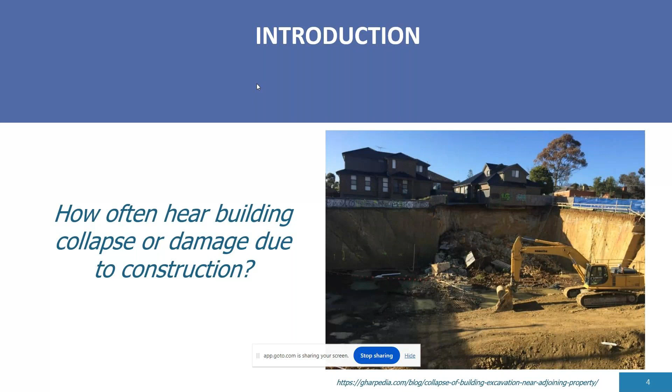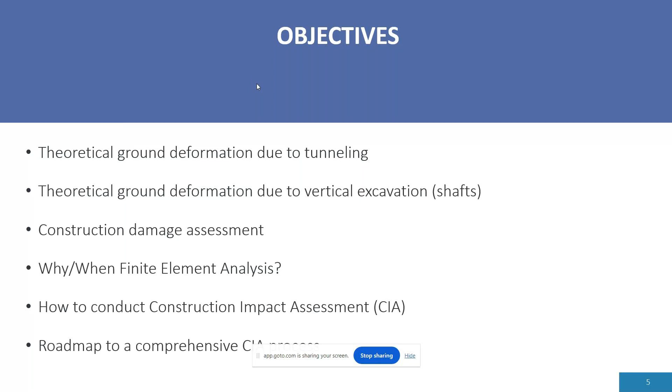So the objective of this session is to look into the theoretical ground deformation due to tunneling and excavation, which means vertical shafts, and also how we can conduct construction damage assessment, and why and when we can employ finite element analysis in this study, and how we can conduct a construction impact assessment and a roadmap for a comprehensive construction assessment.

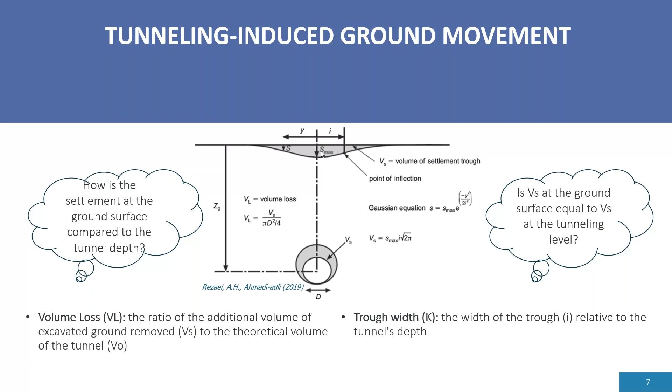So if we start to look into vertical excavation induced ground movement, there's a lot of theories that have been put forward to come up with the ground deformation curve, which depends on many factors.

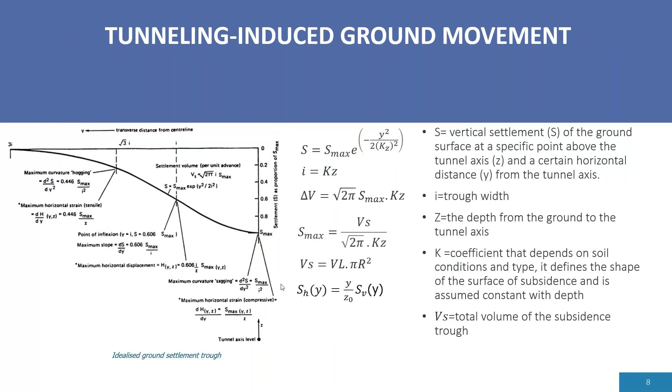For example, if our shaft was circular, some research has been done here. New 2017 conducted research based on circular shafts that happened at the London airport, and documented his observations, coming up with a routine or mathematical equation that fundamentally depends on the distance from the shaft, the excavation depth, and also the soil type.

It also depends on the width, the diameter of the excavation, and some empirical factors that depend on the construction method and the soil, to come up with the size of the ground and the depth of, or the value of the settlement relative to the width of this deformation curve.

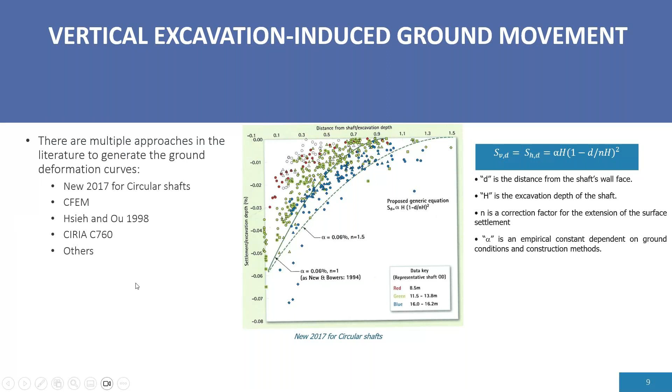For other shapes of shaft or vertical excavation, several methods have been adopted in the literature. For example, the Canadian Foundation Engineering Manual has employed a method, and CIRIA C760 and other methods have been explained thoroughly in the literature to come up with that.

If we look at the Canadian Foundation Engineering Manual, the ground deformation curve that happens due to excavation can depend on the type of excavation, or also our shoring or retaining structure. Based on the deformation of the lateral support system, we can have a different adjacent ground deformation curve.

The literature here, including the Canadian Foundation Engineering Manual, adopted this method to come up with the deformation curves. Based also on the type of soil, if the soil is sand, the manual has proposed curves that we can use to come up with the ground deformation curve based on the maximum lateral deformation that happens from the wall.

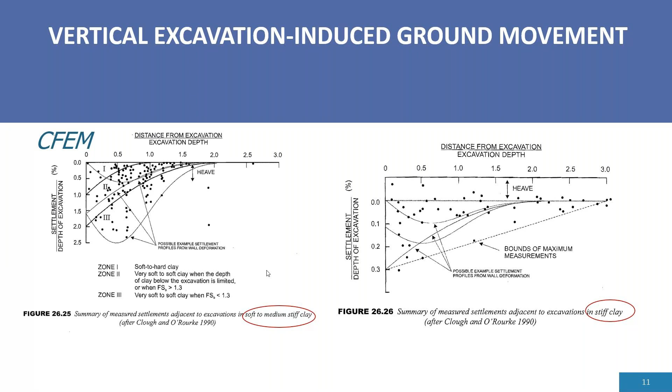If our soil adjacent to or in our excavation area is soft to medium or stiff clay, there are also curves that we can adopt in order to come up with the adjacent deformation curve, either vertical or horizontal.

Okay, this is very good so far. We already theoretically know how we can come up with vertical deformation that comes due to horizontal excavation from tunneling or cavern. And also we can now come up with a ground deformation curve that came from a vertical excavation also. But how can we integrate all of them together?

Now, in the world we live in right now, it's quite complex because there isn't only one shaft in the area, there isn't only one cavern or excavation in the area. You might find two shafts, one cavern in one area, and you need to start to integrate all of this deformation curve together in order to study the effect of this ground deformation on the adjacent structure. So we have excavation 1, excavation 2, excavation 4, and we have a building somewhere.

So you need to superimpose the effect of excavation that comes from one excavation onto the other, and then study this overall value of deformation into this building. Now it starts to be quite a complex process because with the number of complexity of different excavations and multiple buildings, this starts to be really hard and tedious to do.

So there are some commercial software that you can use in order to integrate the ground deformation curves that come from this theoretical values and create an overall map that you can adopt for your study. Yet it's still based on theoretical calculation.

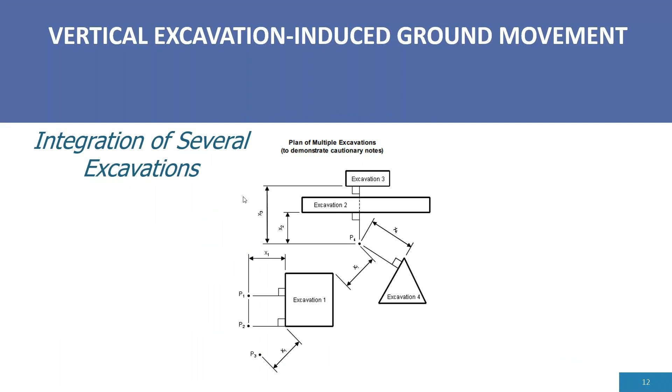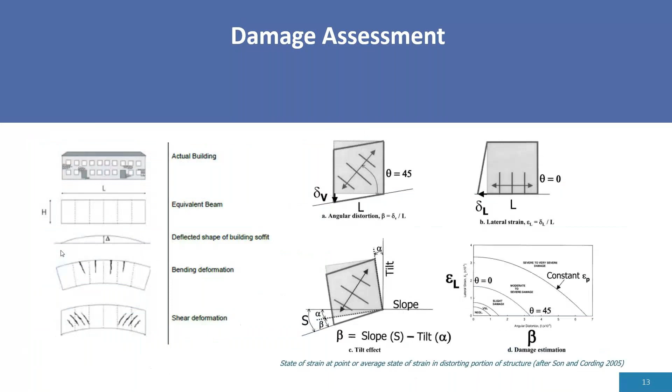Then this became outdated, and Son and Cording developed a critical tensile strain which corresponds to the level of damage. Based on the lateral strain and the angular distortion that we calculate, we can categorize this damage.

Whether we can say this damage is acceptable or not basically depends on the agreement in the project you're working on. In this project, they look at the damage and say the slight level is the threshold I can accept, or I will be accepting the damage until very slight, which doesn't require any mitigation measurement after the assessment.

But if this structure has encountered slight damage, I would say now I require more assessment, more investigation, or I will move to conduct mitigation measures to ensure that this building will be safe during and after the construction.

So fundamentally, this assessment we've seen is basically for a shallow foundation, or a building supported on isolated footing, which will fundamentally impact the brick system and the serviceability of the building.

But what if our building is bearing on a deep foundation? This is a different story, because now if we have excavation adjacent to a building supported on a deep foundation, it starts to be more complex, because this foundation will encounter different types of failures due to the extra load that comes from the excavation.

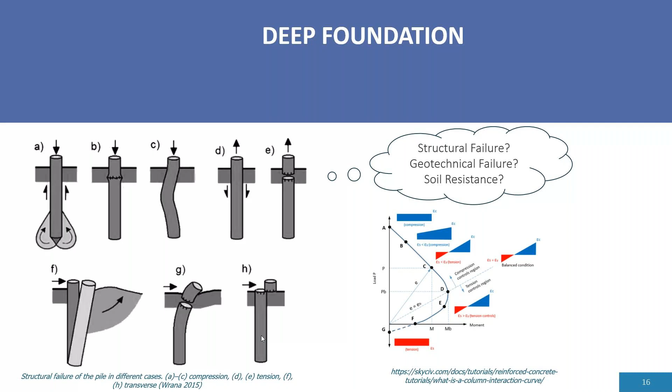Now this requires more thorough investigation. We can't just look into theoretical equations and come up with an answer. So now comes the question of why and when we can start to use finite element analysis.

Due to the complexity we now have in the world of excavation or infrastructure - different soil stratification, different excavations adjacent to each other, interaction between deep excavation from a shaft and also horizontal excavation that comes from a tunnel.

Now we need to look into more thorough investigation, along with the different supporting systems for all of them. For example, we need to conduct finite element analysis, where Midas can provide a great software, GTS NX.

We can conduct a deep excavation analysis and thoroughly see the vertical settlement that can happen due to this excavation. It's quite complex if we start to create different excavations in one model plus horizontal cover in one model, but we still can do that.

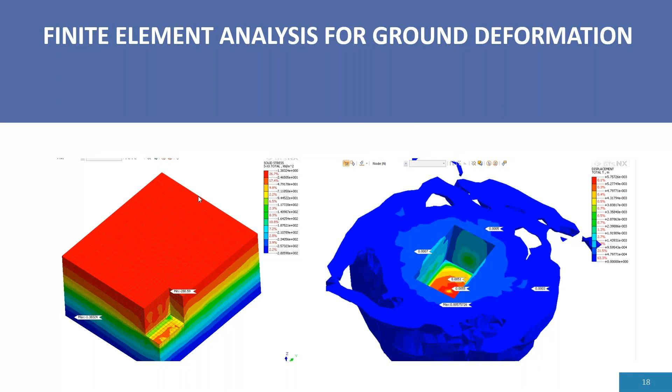So we can use an enhanced 3D finite element analysis to come up with the ground deformation curves, both vertical and horizontal. We can also use the same model to calculate internal forces in different structural elements, either the sheet piles, the waling system, or the anchor, and conduct a design based on these internal forces to optimize our design.

There are several benefits from creating a model like that. First, especially in 3D, it takes into account the corner effect and the 3D behavior. Also, you can use advanced numerical modeling to come up with the internal forces in the waler and the anchors, and perfectly design them.

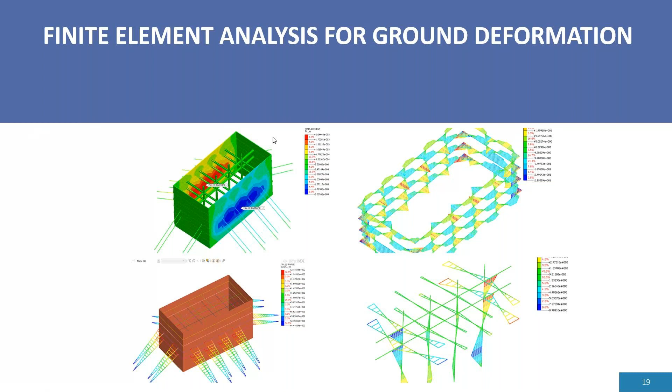Then you can eventually come up with a ground deformation curve that we can employ into the construction impact assessment, instead of relying only on theoretical values from the literature.

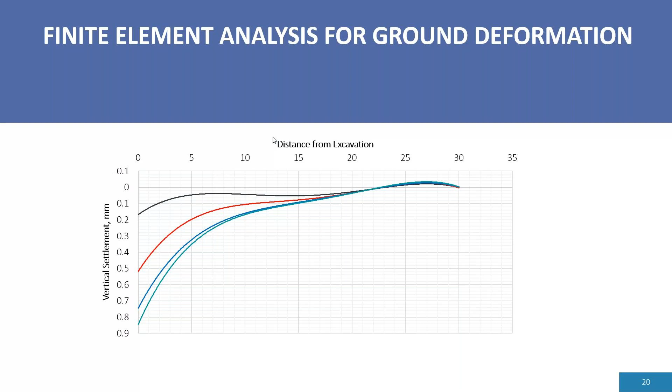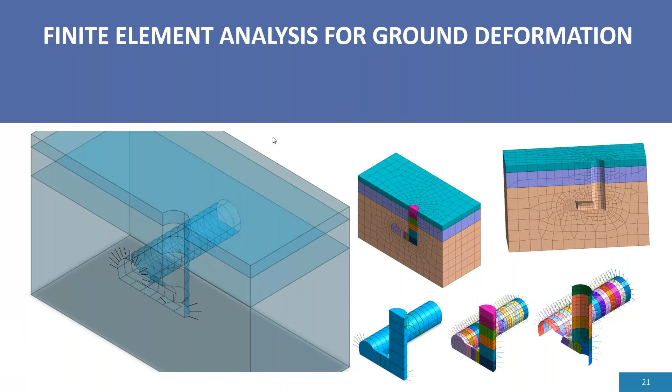We can also use finite element analysis to conduct horizontal excavation analysis. Here we see a connection between a circular shaft and a horizontal excavation. We create this model and come up with the settlement in the horizontal excavation in X and Y directions, and we can also create the ground deformation integrated from the vertical excavation, then conduct our assessment.

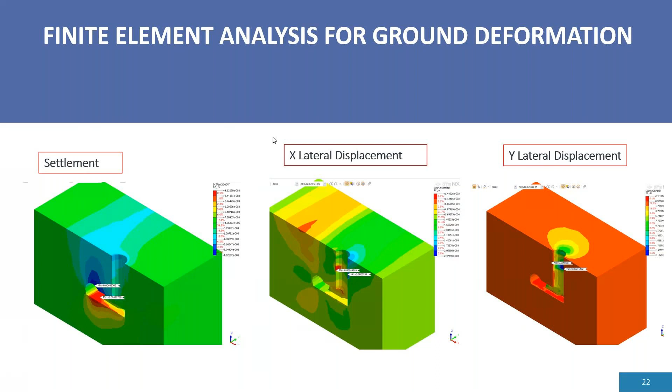One more model we can create: this presents a 3D TBM excavation analysis, from which you can conduct a construction sequence. The goal of this session isn't how to create this model — Midas provides tutorials for that, and I have tutorials on my YouTube channel covering how to create this model.

The goal here is how we can employ the finite element analysis model to create a more enhanced assessment, not only for the design of the excavation, but also to ensure the safety of the adjacent structures.

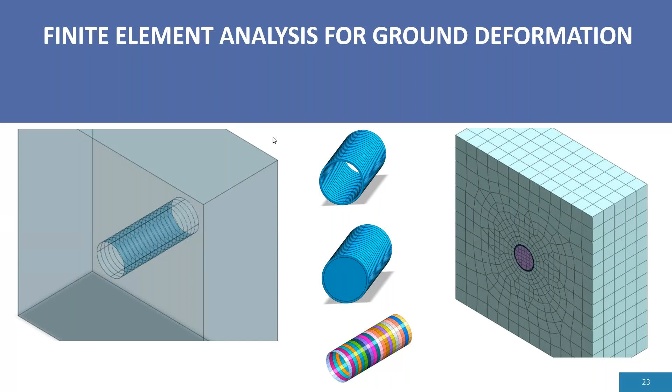From the horizontal excavation, we can come up with the total deformation, which we can extract from GTS NX. I extracted the ground deformation curve at the top here, and we get a nice curve comparable to the theoretical one we already looked at in the beginning.

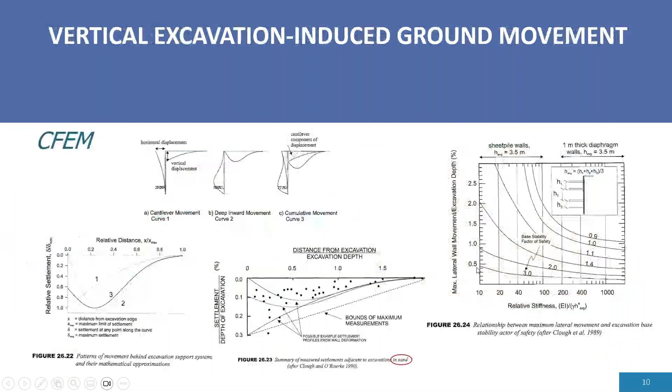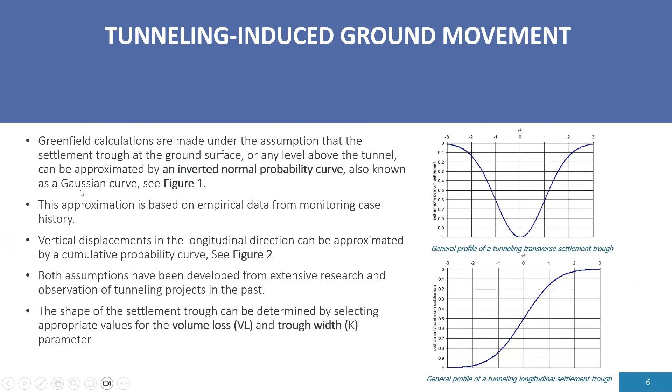We can see that we get this inverted normal probability curve, or as some call it, a Gaussian curve. Now we already have a curve comparable to it from the finite element analysis.

I just want to refer back — in the theoretical analysis, we basically depended on creating this graph based on the volume loss and the trough width. These two values, when you start your theoretical assessment, can be assumed, either from the literature or from your knowledge of the area where you conduct the excavation. But an assumption is still an assumption.

In order to enhance the values of the trough width and the volume loss, we can conduct a 3D finite element analysis. We can come up with a ground deformation curve, and we can use this ground deformation curve to calibrate a K value, a trough width value, and a volume loss value.

Then we can use these two calibrated values to create an improved theoretical ground deformation curve. So far we have seen how we can come up with the ground deformation curve from the theoretical equation for tunneling, or horizontal excavation, and also from vertical excavation.

We have also seen that we can employ sophisticated software analysis like GTS NX, using enhanced modeling techniques and enhanced soil modeling, in order to come up with a more improved or more educated ground deformation curve. We can calibrate this deformation curve, for example for the tunneling part, to improve the assessment of the theoretical one.

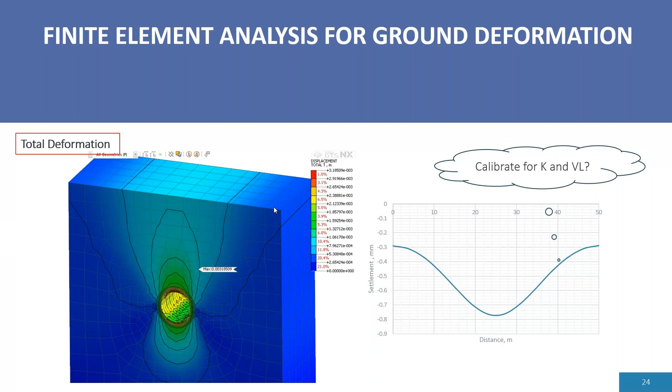So now we've established that we have the ground deformation curve. We already know how we can integrate them together and conduct superposition for all of them to create a full map for the whole area from the vertical excavation and also the horizontal excavation.

So let's think about what routine I would be using in order to conduct this assessment. Should I rely on the theoretical assessment, or should I just start with a finite element analysis? Finite element analysis can be a bit complicated, but it gives me the advantage of reliability.

So in general, whether you have the ground deformation curve from theoretical or finite element analysis, there is a technique, or a series of assessments, that you have to go through first. We call these phases.

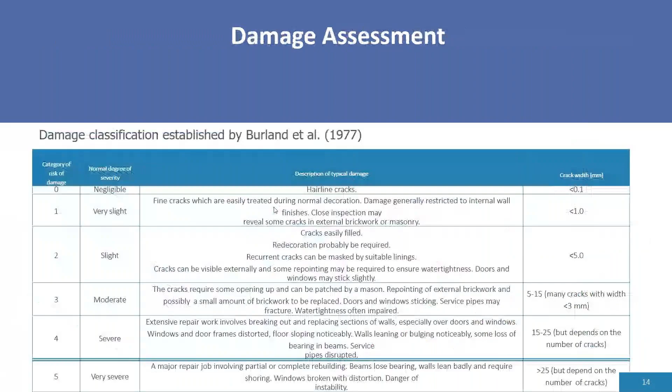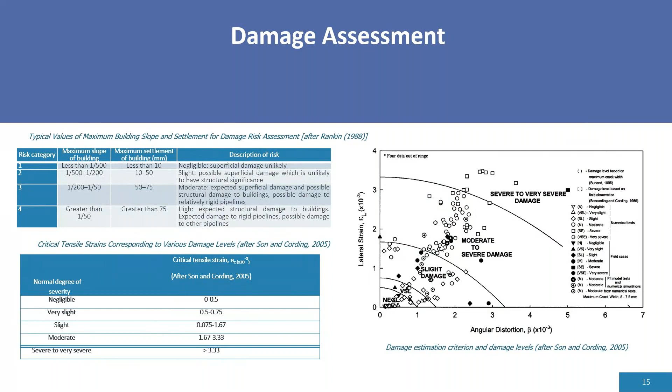Phase number one we call the first estimation phase. If we go back, we said we can conduct the assessment based on Rankin, which employs the slope and the settlement, which is quite simple. We can calculate the settlement, we have the slope, and we can conduct that. Or we can rely on the lateral strain and the angular distortion based on Son and Cording, and classify our damage assessment based on that.

So what are the steps to do that? First, depending on the ground deformation curve we have from theoretical or finite element analysis, we first look into the maximum settlement and the slope. We look at the first row in the Rankin analysis, which classifies as negligible: if the settlement is less than 10 millimeters, and the slope due to the excavation is less than 1 over 500, we say that this is acceptable.

However, if it doesn't fulfill that negligible criteria for Rankin, we assume this is unacceptable, and we move to a second estimation phase. So what is the second estimation phase?

The second estimation phase depends on the lateral strain and the angular distortion. Now we need to conduct more calculation to come up with the lateral strain and the angular distortion. I need to emphasize one very important thing: in the second estimation phase, we're still relying on the green field analysis, or the settlement that comes from the green field. I am not assuming any soil-structure interaction with the structure.

So I'm just looking at the ground deformation curve due to the excavation and ignoring any stiffening of the soil due to the structure. This is based on the first estimation and the second estimation that come from green field analysis, where there is no soil-structure interaction so far. So now I'm still looking into this green field.

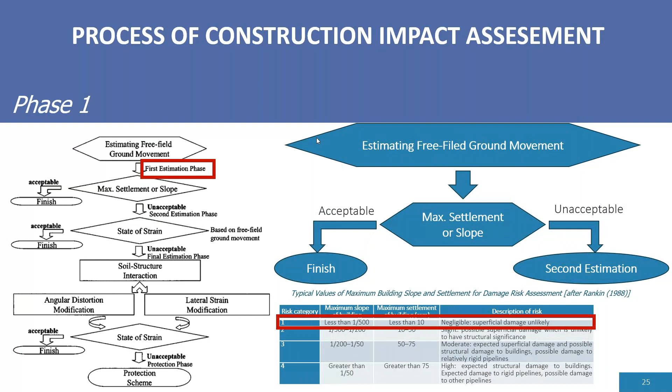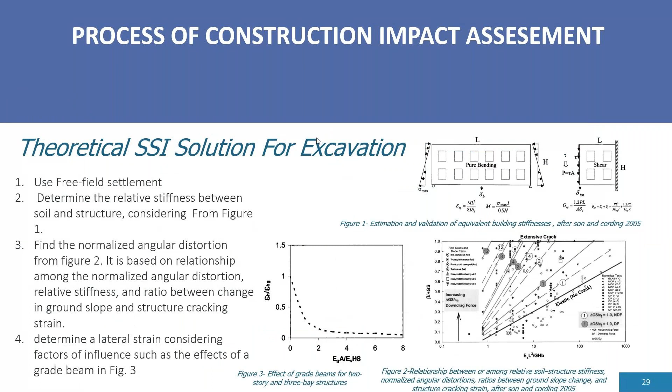So what's round number two? We move the building assessment from this simplified approach to a better assessment. Mostly we start our excavation by conducting a 2D analysis if we assume our excavation has plane strain behavior, or axisymmetric if we're looking into a circular shaft.

You can use GTS NX to conduct a 2D finite element analysis, and you can come up with a ground deformation curve adjacent to the vertical excavation. Or you can calibrate your Gaussian curve based on the trough width and the volume loss to come up with the ground deformation due to tunneling, integrating them together in one map that takes into account the vertical excavation and the horizontal excavation. Now we've created a more advanced, more enhanced ground deformation curve.

Then we conduct the two phases again. In the first phase, this is still based on the ground deformation curve. In the second round, we still haven't added the structure yet. We're still just simulating the excavation, either vertical or horizontal, and coming up with a free field or green field ground deformation curve.

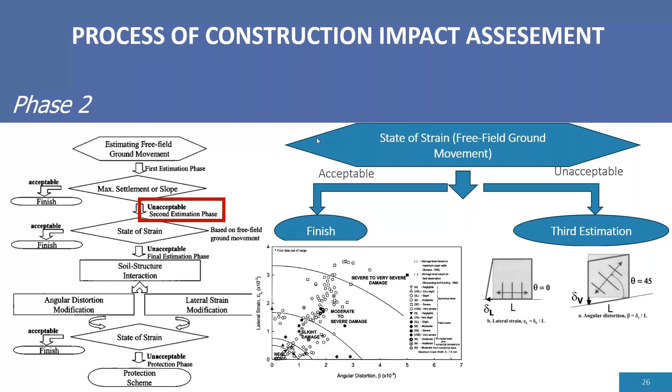We go back again to the same flow chart that we use for the damage assessment. So we look into the first estimation, which is based on the settlement and the slope. If it's not passing ranking, we move to the second line in the flow chart, or second phase, based on the lateral strain and angular distortion, and classify the damage.

Now, if the building doesn't pass the criteria for the second round, where I'm depending on a finite element analysis in 2D or axisymmetric analysis using GTS NX, for example, we can move to conduct an enhanced assessment by simplifying the building into a 2D analysis, which sometimes ends up being simplified or approximated. Or we can conduct a mitigation measure here.

The third option is you can move to the third round of the assessment, where you conduct a full 3D finite element analysis, assuming the existence of the superstructure and also the existence of the soil and the excavation. You can conduct this analysis for the superstructure part in a structural software, Midas Gen, for example, and export it.

The good thing is that the compatibility between Gen and GTS NX means you can export the model and the result from the structural analysis to conduct a full superstructure-structure-foundation interaction analysis with the soil. Now you can see the effect of the excavation onto the building and its foundation using GTS NX.

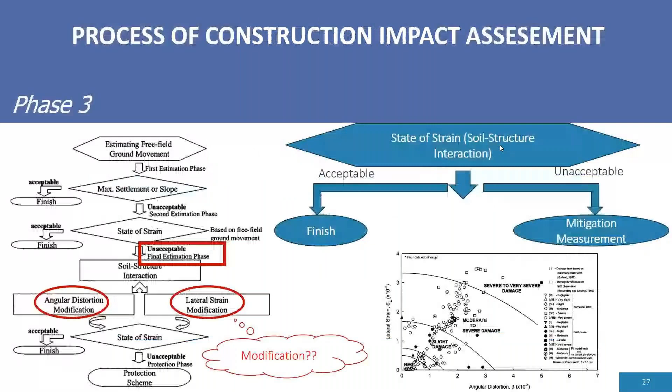And if you're still encountering a problem in the adjacent building based on the flow chart, you can move to conduct a full 3D finite element analysis. Now you've covered the third part of the flow chart, which accounts for a 3D finite element analysis. The good thing about conducting a 3D finite element analysis is you can also simulate the building, or the adjacent structure, and have a more enhanced assessment for the whole area.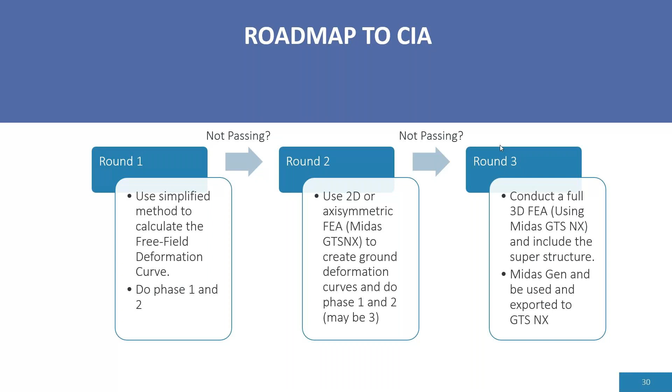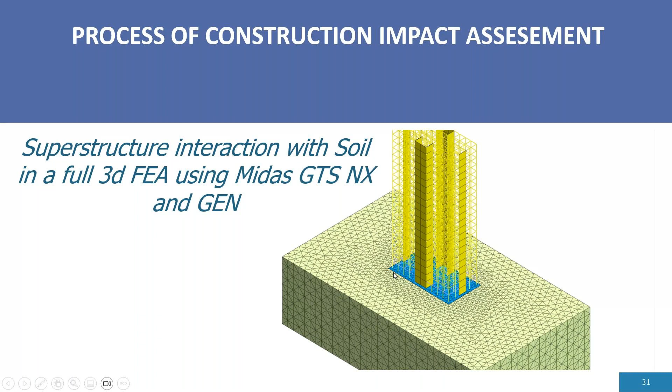So we can see here how we can conduct a superstructure interaction analysis using Midas Gen, and I imported the result from Midas Gen into Midas GTS NX and conducted a full superstructure-soil interaction analysis.

To summarize, ground construction impact assessment is a very crucial component of any project. It's very important to support the excavation and make sure it doesn't fail. But what's also really important is to ensure the safety of the adjacent structure, and that nothing will jeopardize its integrity, like cracking or failing - we are saving the life of the people around.

The second thing from this session is the assessment reliability mainly depends on the ground deformation curve that results from the construction work and also from the background information. Two components are important: when looking at background information for adjacent structures, we need a full understanding of how it's been built, its foundation system, the depth of foundation, whether it has a basement, where the ground level is, and what type of soils are in the area.

You need to know what load was used for the design, the usability of the building itself. So a lot of background information is very important when conducting a construction impact assessment to understand the adjacent building. And the second thing is the ground deformation curve.

When it comes from a theoretical assessment, we have to understand it's theoretical and approximated. It might overestimate or underestimate the ground deformation, but it's still a good way to start. We can't only rely on the theoretical one - we have to conduct a finite element analysis to strengthen the reliability, using a 2D finite element analysis or axisymmetric analysis that gives us an improved ground deformation curve.

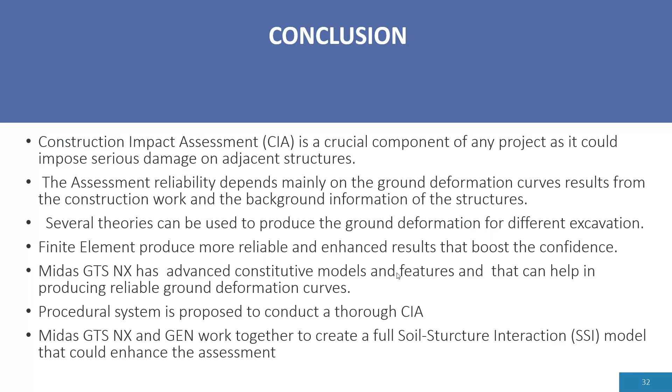We have also discussed the importance of using finite element analysis in combination with structural software like GTS NX with Midas Gen, to come up with a full soil-structure interaction model that can enhance our assessment - important both for shallow foundations and for buildings supported on deep foundations. That would take us to the end of the session.

I think I am good in terms of time to have some minutes for questions.